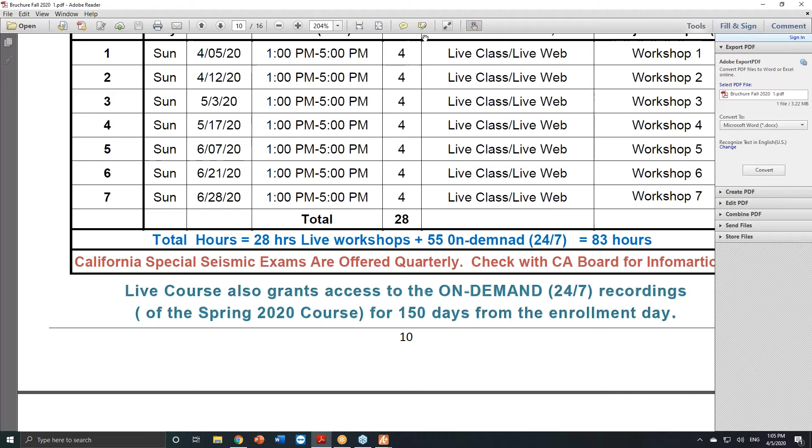Okay, good afternoon everybody. This is Dr. Mansour, and this is the seismic review for the second quarter. Today is April 5th, 2020, and this is the first session, as you can see by the schedule. So, the second quarter review.

Basically based on the textbook which I used in the first quarter, plus the 626, which has all the problems in all my books, the textbook, and the 300, and the 2 practice exams.

The course basically consists of 2 parts. The first part is the live workshops, the one we started just now, 28 hours, plus 55 hours or even more, I believe, until last night. My staff are working from home to set up everything to make it ready for you for the on-demand.

For the on-demand, you will get a username and password from us, where you can access the on-demand, which is 24/7 from any media. Normally we keep this for 150 days, so you will get access for 150 days.

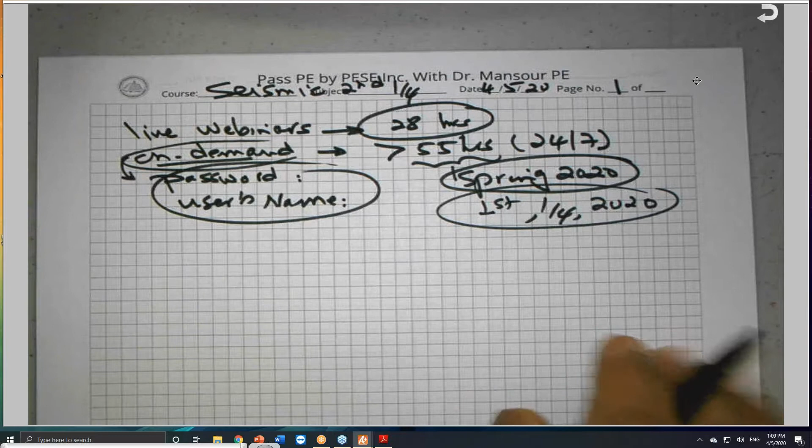So the current codes, or the on-demand, are based on the current codes, which is basically the California Building Code CBC 2019, which is based on the IBC 2018, and the major code is the ASCE 7-16.

Plus the other codes are still the same: the ATC 20, ATC 20-1, the timber design book, the textbook by Dr. Breyer, the masonry, and the timber book.

This textbook that I've used for about 20 or 25 years, meaning the Design of Wood Structures by Dr. Breyer, the 7th edition is still current, and this is Dr. Breyer's Design of Wood Structures. So this is wood design - let me use this standard language, wood design.

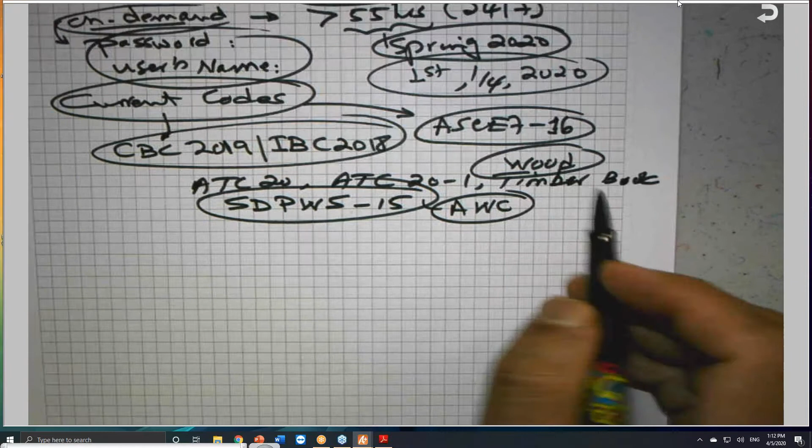Total, they are 9, I believe - 9 references, yes, they are 9, listed at the beginning of my textbook under the green tab. The green tab is special seismic exam, and they are - no, I'm sorry, 6. The 9 is the other course. Sorry, I mixed codes, too many codes, too many.

Let me get the other book. I believe the other book, the printing—there was one time the printing was bad. This one you can use, I believe this is what I call the correction copy, at least I can write anything. Yeah, this printing is the right one. So they are 6, no, not 9, as I mentioned. Sorry.

The other exam—so the 2019 California Building Code, Volume 2 only. You need Volume 2 if you decided to purchase that, or you can use the IBC. I prefer the IBC, it's much simpler and cheaper. If you'd like to purchase, you can purchase the IBC 2018. It's one volume.

The IBC is one volume without the commentary, but sometimes they have 2 volumes, where one has the code and the other has the commentary, which is an explanation of the code. So this is one reference.

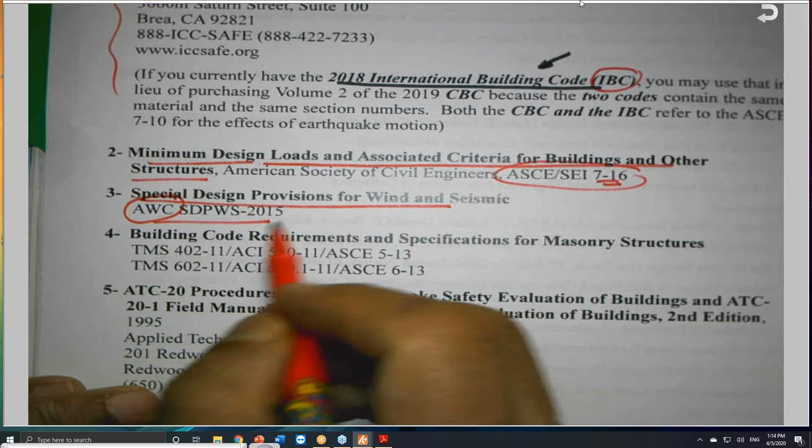The second reference is the minimum design loads and the associated criteria for buildings and other structures. This is a new code, the ASCE 7-16—10 is gone. There's also the special design of wind and seismic by the American Wood Council, AWC, and the special design provision for masonry, building code requirements and specification for masonry structures, another book by ACI 530, American Concrete Institute.

ATC 20 and ATC 20-1, second edition. And finally, number 6, Dr. Breyer's book, Design of Wood Structures, 7th edition, 2014, based on the ASD and the LRFD, the allowable stress design and the load and resistance factor design. So both design philosophies are included in the book.

So those are the references, plus the standard test plan, which I need to be aware of. I highly recommend you visit the California board website, which is available on our website, to see all the updated information, instructions, or news, especially in these days. I monitor this very carefully and frequently—California Board and NCEES—to see the status of the exam, new codes, new regulations, new standards, and new calculator policy, because they change from time to time.

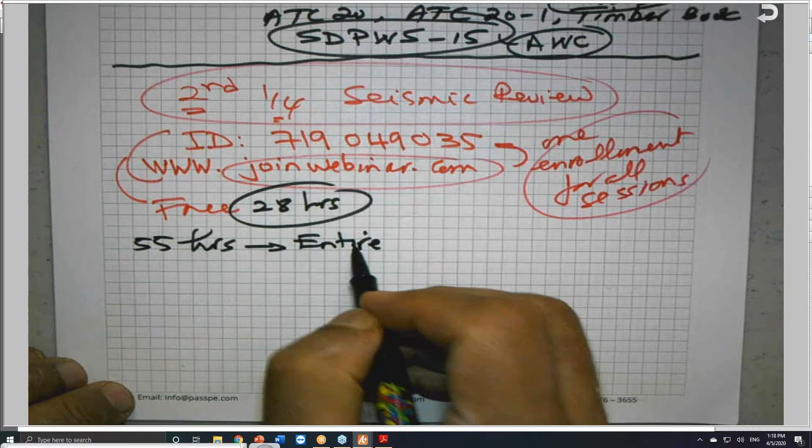55 hours, which is a course itself, because the 55 hours, this is the course I taught last semester. This is the entire course where I went chapter to chapter, and those who attended the first quarter know exactly what I'm talking about. We covered it to the best of my knowledge very well, and I did my best to explain all the topics and subtopics, and we solved many problems.

The workshops this quarter will be devoted entirely to solving problems, plus the concept. Any concept that is not clear to you, I will be glad to explain it.

For those of you attending the class for the first time, you need to go and watch this, watch the class, the on-demand by itself. Some other vendors sell the on-demand by itself as a course, and that's it. Here I am giving the on-demand plus the 28 hours of live class, so we can chat with each other and go over problems. I can explain topics or subtopics. But for those attending the first time, the on-demand is the one you need to watch, and you will hear the same thing. If I'm teaching the course again, you will hear the same song.

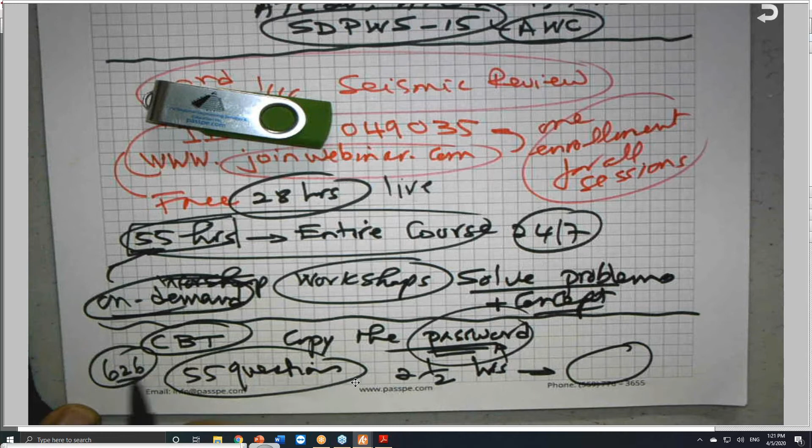In the 626, there are some overlapping problems. The problems are repeated twice sometimes because they are mentioned in some books and repeated in other books with some kind of variation. So I needed to take it seriously, even if you feel this problem already repeated before - look at it closely and do your best.

If you have any problem loading the software or running the software, I don't know how to fix it - I will forward your questions to the webmaster. So far we don't have any or very few problems, and I will do my best to help you as much as I can.

Okay, this is just the introduction. So let's go to the business of working problems, the way I was hoping to do it but didn't get a chance to - maybe I will do this next session.

Let me get my book here first, just to make sure - I have too many books next to me. I don't know what happened to my 626 with the cover, unless I gave it away, unless it's here somewhere, hidden. Forgive me, just let me get my stuff here.

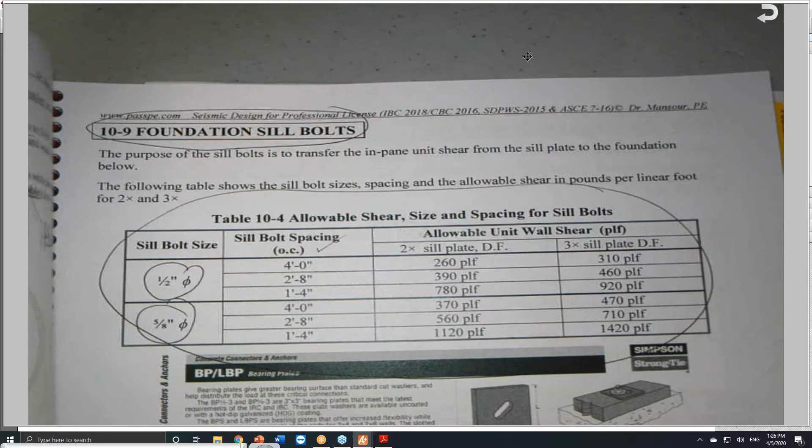This was something that, if you go to chapter 10, when we are calculating the rigidity for a shear wall, H over D, let me locate it quickly and I will tell you where it is. It is mentioned in chapter 5 and it was correct, but here, yeah, when I talked about shear walls.

So if you go to the text again, let me make sure I'm using only 2 books. When I say the textbook, this is the textbook, Seismic Design for a Professional License. And when I refer to the other book, I refer to it as the 626 book, book number 2. If you'd like me to write down book number 1 and book number 2, it would be a good idea. Sometimes I do that with other courses when I have more than one. So this is book number 1, which is the textbook, I call it textbook.

And book number 2, which is the 626, is a supplemental book that does have all these fancy questions, all these questions. So I will call it book number 2. This is number 2, which is the supplemental book or the 626 book, whatever you'd like to call it.

So if we go back to the textbook, just to make sure, in chapter 10, in calculating the rigidity R, I believe something is missing. It's mentioned correctly in chapter 5, but when it was copied to chapter 10, for some reason it was not. So if you go to chapter 10, I'm talking about this equation here. Let me make sure, this equation is on page 378, textbook.

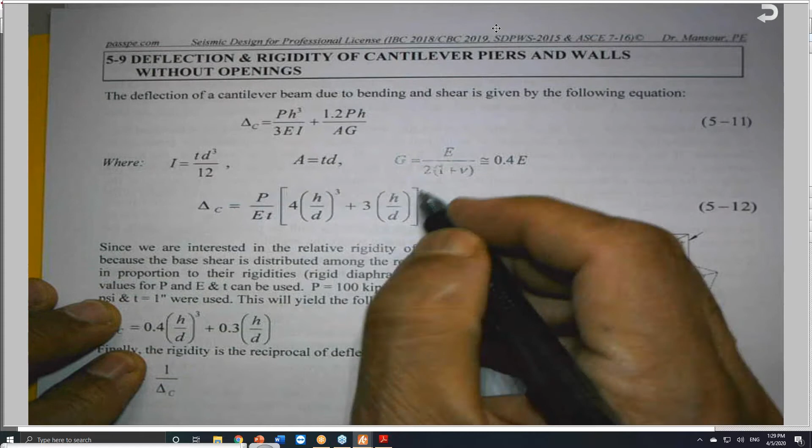You will find these 2 equations identically. I repeat them here just to remind you, in chapter 5. Let's go to chapter 5 so we can compare these equations. Okay, to make sure that we are, this is delta C, which is equation 5-13.

This is the correct equation: 0.4 H over D cubed, divided, plus 0.3 H over D. This is 5-13, I will call it 5-13 also. Sorry, this is for the cantilever. Yes, so this is equation 5-13, on page 152.

And the second equation, oh, so the mistake is in chapter 5. Now I realize, okay here it is. If you go to page 153, this equation 5-17, it is missing here H over D. Okay, here it is, which is the second equation, which is for the fixed case. This is on page 378 of chapter 10, you will find the H over D is here. So it is missing in chapter 5.

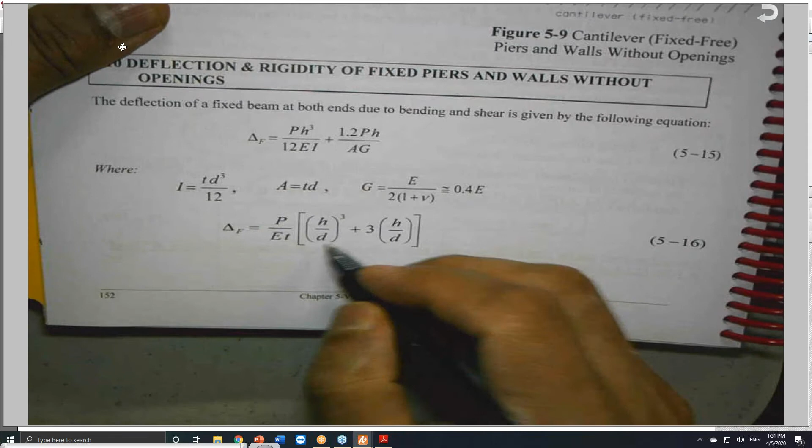So in chapter 10 it was correct, I reversed it for some reason, but here it is. I'm saying that here it is. So this is on page 153. Go to page 153, all you need to do is add H over D here for this equation. So this is something mentioned here, by the way, on the previous page. This is the equation, okay. But the H over D is over there, it was dropped.

So equation 5-13 is correct, and equation 5-17 on page 153, I need to add H over D, multiply 0.3 times the H over D ratio. So in this case, the two equations in chapter 5 match the equations in chapter 10. Okay, this is one thing that one of you pointed out. Thank you very much, if you have doubt about any.

The other thing that we corrected together in the seismic design category, it was copied, it is in chapter 13, masonry. Can you go to page 440? Page 440.

At the top here, I extracted the masonry seismic force resisting systems, SFRS. I extracted them from Table 12.2-1, this big table. But here it says seismic design category B, no, it's supposed to be, as in boy, C, D, E, and F.

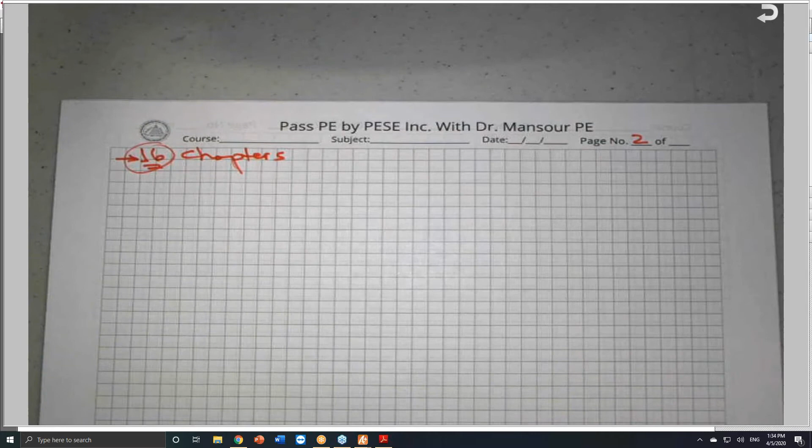Here I have 626 problems. My intention was, but because of a lot of things going on including my schedule, to extract some problems from here without the solution, just the problems, and put them in a form like a practice exam, and I need you to solve it in advance before you come to class. After that, they are coming from the book. I'm not going to reinvent more than what I have, or maybe add some problems here or there.

I always modify the problems, but I believe those who studied my books before, even without taking the course, it was sufficient for them to pass. They told me, Dr. Mansour, your books are self-contained, and we were able to understand everything because I explained as if you are sitting in a classroom. I try to explain as much as I can, but nobody is above mistakes, and nothing is called complete work. There is always room for improvement or continuous improvement. So this is my intention.

Probably next time I will do that because I was really busy with tons of things, this issue about family. So next time we're going to meet one week from today, so it is 7 days. Probably I can work on something and send it to you.

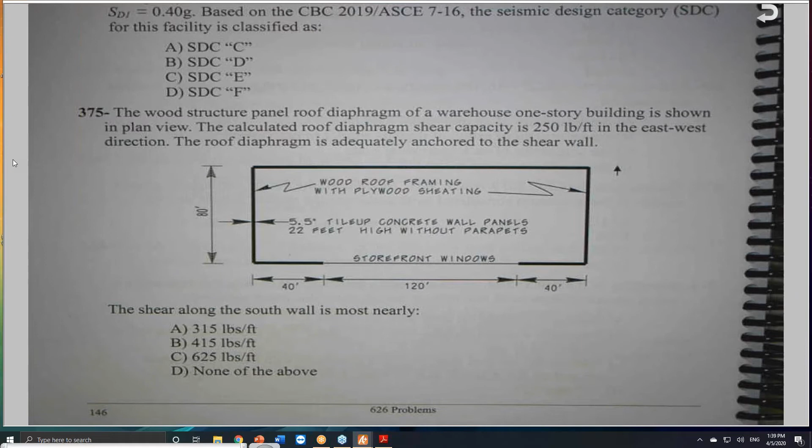So let's go to a problem. I'll open the book randomly - problem 375. Some of you are new, so I will walk you a little bit through the theory. Let us read the problem.

The most important thing in any exam, specifically seismic and surveying, is that you have only less than 3 minutes per question, because they give you 55 questions and only 2.5 hours. If you calculate 150 minutes divided by 55, it's less than 2.7 minutes per question.

So don't assume that these questions have the same time as the national exam. The national exam, as you know, gives 6 minutes per problem - they give you 40 problems in the morning and 40 in the afternoon, with 8 hours total. So the time for the seismic and surveying questions is less than half of the time given for the national exam. I don't want you to assume you have plenty of time - no, it's less than half.

This is the impression some engineers have, and they go in with that assumption. Your speed for the seismic and surveying exam should be twice, or at least more than 2 times faster, than for the national exam. Even on the national exam we say we don't have enough time - the seismic and surveying exam makes it worse by giving you less than half the time for each question.

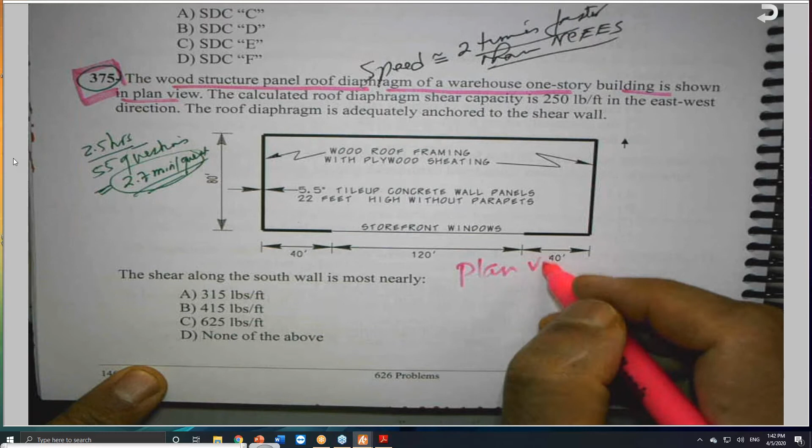The calculated roof diaphragm shear capacity is 250 pounds per linear foot in the east-west direction. There's something a little bit missing from the picture - there's supposed to be an arrow here indicating north arrow. This is something missing, I think when they cropped the picture and brought it from AutoCAD or MicroStation to Word, it seems to me this got left out.

So please note this arrow indicates the north arrow, because the direction of analysis is very important. In the east-west direction, if this is north, this is south, this is east, and this is west. The roof diaphragm is adequately anchored to the shear walls. The question is: the shear along the south wall is most nearly. From the plan view, these solid dark lines indicate shear walls.

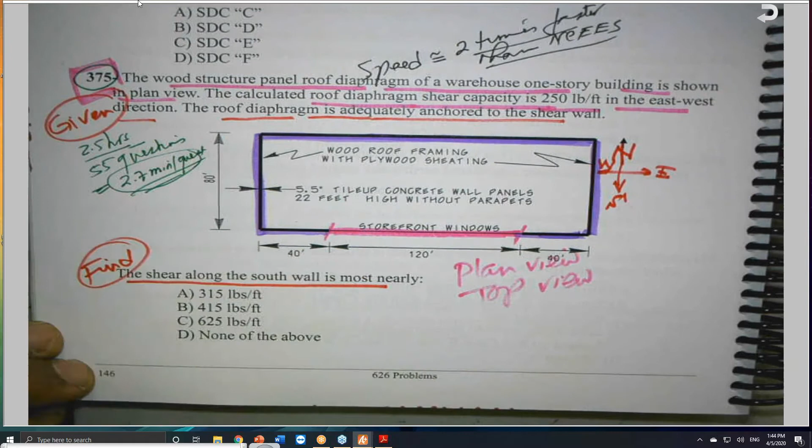And the shear along the south wall is most nearly - he's still looking for tau wall, the shear along the wall. But which wall? The south wall. The south wall is 40 feet and 40 feet, one piece here and one piece here. This we call the south wall. This is the north wall. This is the east wall. This is the...

So what is given? If you look at the equation, which I'll show you right now, it's equation 9 dash... Do you remember chapter 9? Okay. 9 dash 2 - let me see if I remember this equation correctly or not. No, 9 dash 3, sorry, and 4. 9 dash 3 and 4.

This is the tau wall. Here it is. This is equation 9 dash 4, on page 338 of the textbook. One equation for the tau, or sometimes we use V, lowercase v. On the same page, 9 dash 3, is the diaphragm shear, tau diaphragm along the shear wall - the shear along the diaphragm. This is the shear along the diaphragm.

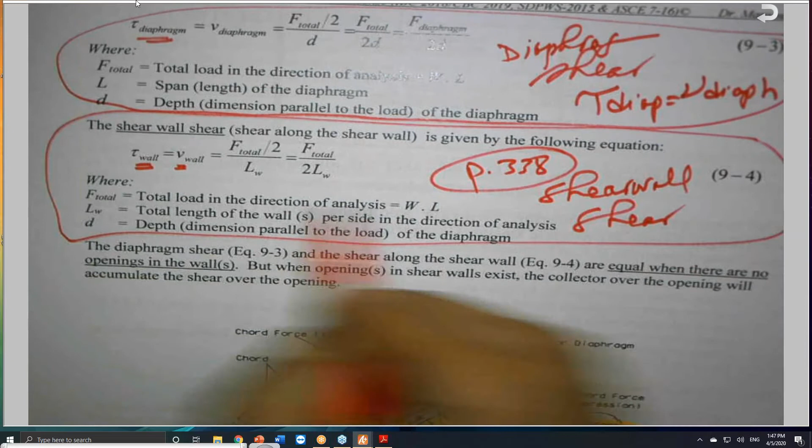We call it tau diaphragm, and this is the tau along the shear walls. So diaphragm shear, and this we call shear wall shear. This is tau diaphragm or lowercase v diaphragm. And this is tau wall, as indicated here, or v wall, as I told you they use this in the seismic design professions.

So the two equations, 9.3 and 9.4, are based on something called F, which is a total force. F is the total load or force in the direction of analysis, which is W times L, if W is given, or W is a uniformly distributed load. If you go to the previous page, I'm referring to this drawing here - if this W is given, which is a load, this is a lateral load.

But he gave me something here. He said the calculated roof diaphragm shear capacity is 250 pounds per linear foot. I need to translate this - what is this? We need to understand this very, very well, please, because this could be the difference between getting the right answer and the wrong answer. If this is the lateral load W, or this is the tau diaphragm - because there are two numbers, I will explain it one more time, because if we can differentiate between these two, that means we are in very good shape.

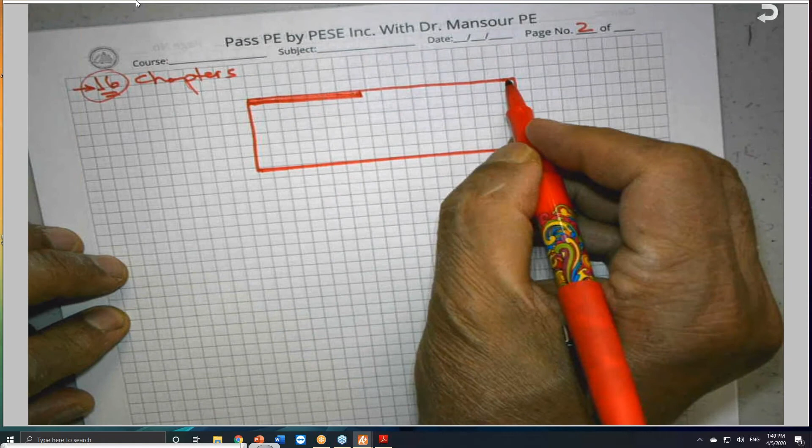Let's assume that we have a wall here. Let's assume this wall here is a short wall like this. Let's assume we have a complete wall here. And we have a wall here. And we do have a wall here - a different configuration. Sorry, my drawings, sometimes I use a straight edge to try to make it nice, and this is normally - the direction is very important, this is why we need to know what direction. So this is the north direction. I will call this wall number 1, number them wall number 2, wall number 3, and wall number 4. And let's give some dimensions.

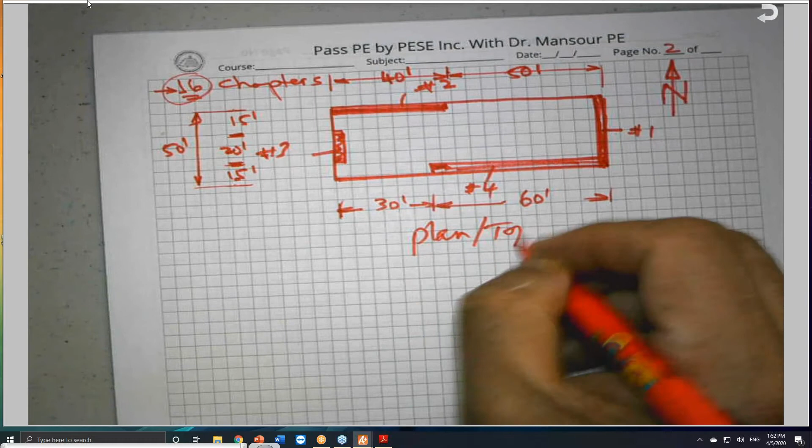So assuming this is centered, assuming this is okay - so this is 15 feet, and this is 20 feet, and this is 15 feet. So the total here is 50 feet. Let's assume this is 30 feet, and from here to here this is almost twice, so I'll make it 60 feet. And this wall here, since this is 90, I will make this 40 and 50, so the opening is 50. At least for those attending without the book, you can follow me - this is 50 feet and this is 40 feet. This is a plan view or top view of a story of a building.

If the lateral load is given, which is the lateral seismic load, obviously I number these walls. This is wall number 3, wall number 2, wall number 1, and this is wall number 4. Let us assume that I give you the load. I said the load can come from east or west - it does not make any difference. So I give you a load in the east-west direction.

To be 80 pounds per linear foot. So this is W, sometimes we call it W, uppercase or lowercase, W sub S for seismic. This is 80 PLF.

Here we can calculate equation 9-3 and 9-4, the one I was referring to. Equation 9-3 says tau diaphragm, or V diaphragm, assuming that this diaphragm is flexible. Let us mention this statement, and I can explain the difference between flexible and rigid, but flexible diaphragm.

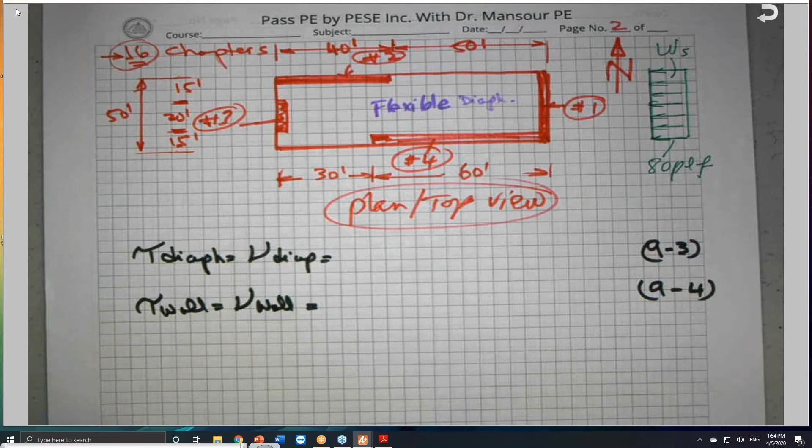Diaphragm, what is a diaphragm? Diaphragm is the roof of a building or the floor of any building. This is called a diaphragm. Diaphragm is a horizontal or nearly horizontal element that will transfer the lateral load to the vertical resisting elements.

These definitions at the beginning of my book, I defined all these things, which I did not create or invent. I took them from textbooks or codes, because if a code has a definition, we have to stick with the definition of the code, because this is what they are going to test you. Assuming that you have a building like that.

So what is a diaphragm? A diaphragm is horizontal or nearly horizontal. This is the floor of a building. This is a diaphragm, this is a diaphragm. This, the entire thing here, the roof, is a diaphragm. So this we call nearly horizontal, horizontal because of the slope. If this is horizontal or nearly horizontal.

So this and this together acting as, because this is one piece, this is the roof of a building, roof. So this is a diaphragm. And what is the purpose of a diaphragm? Diaphragm is a horizontal or nearly horizontal element that will take the lateral force, seismic lateral force.

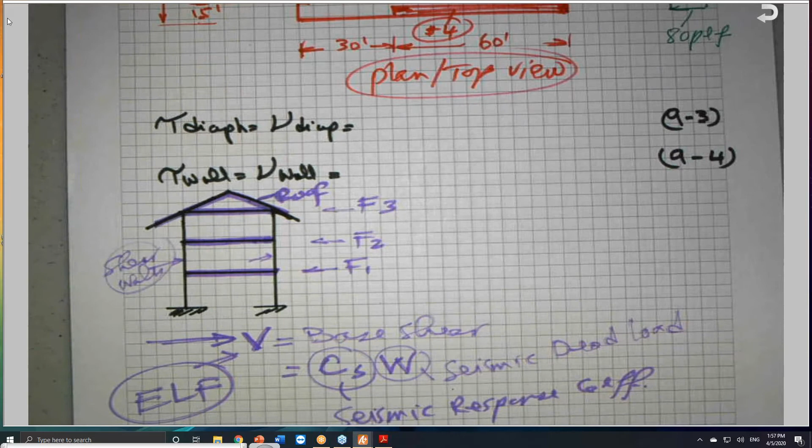So the shear walls or the frames of a building frame, if a building frame exists, will take care of the lateral forces. So these lateral forces will go through the diaphragm. Diaphragm will give it to the columns, and the column or the shear wall will take it to the foundation. And this is our ultimate goal, to get the base shear, and this will be the distribution. Do you remember the distribution? We talked about distribution in chapter 6.

Distribution, when we said that F sub X is equal to V times C sub VX. This is a vertical distribution factor. C sub Vx.

So the distribution will be done, and this force will be determined. This is not the story right now. The story that I'm telling you is that a diaphragm is the roof of this building. But I try to elaborate a little bit, at least to remind you of what we are talking about. So this is just to explain what this is given. This is given as the seismic load.

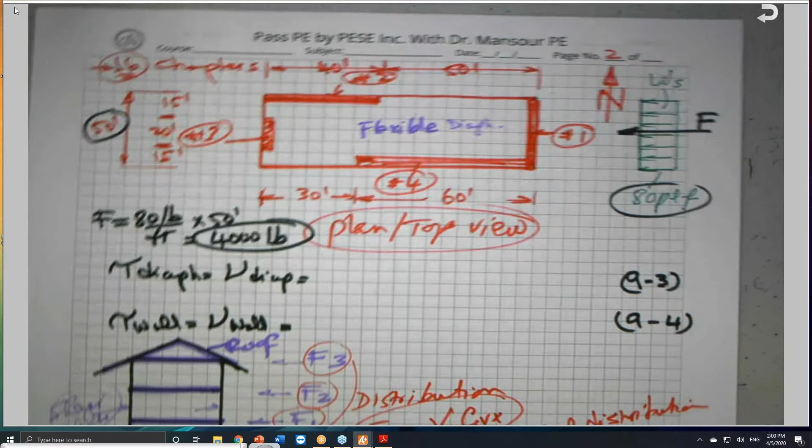Since this is a flexible diaphragm, half of it will come here. This is F over 2, and this is F over 2.

So tau diaphragm, if you go and look at equation 9-3 one more time, where is 9-3? Equation 9-3 is F over 2, half of the force, divided by D. We need to be careful what is D and what is L. Very important.

Do you remember that in chapter 9, what is D and what is L? D is the depth and L is the length. We have a dimension parallel to the load, and a dimension perpendicular to the load.

Dimension parallel to the load, as you can see, the load is coming this way, east-west, and there's a dimension perpendicular to the load. We call these chords, in fact it will be like this, this is going to be like this, and this is going to be like this. This chord will be under compression, and this chord will be under tension.

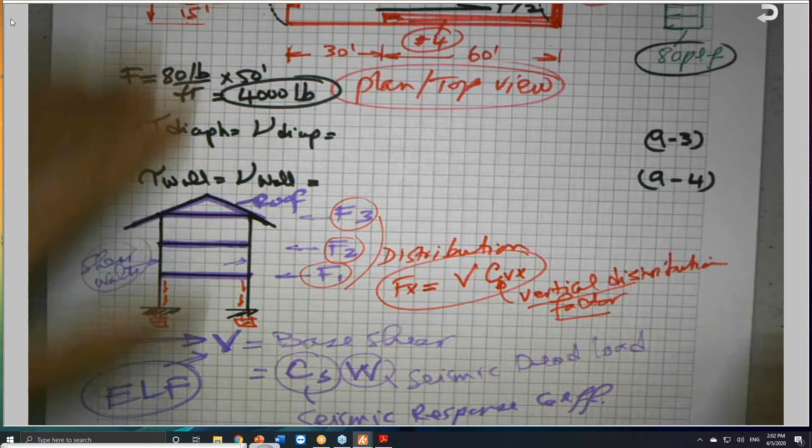Do you remember this 3D view on page 338? So this dimension and this dimension, which is perpendicular to the load, we call it L for this direction. So this dimension here is L. Always the length is the dimension perpendicular to the load, and it's mentioned at the beginning of the book. The other dimension from here to here, we call it D, as in David or doctor.

The reason we don't use W here is because we are using W here. So the V diaphragm is equal to F over 2 divided by this length here, because the diaphragm exists over an opening. So 50 and 40 is 90, divided by D.

So in this case, F over 2, which is 2,000 from 4,000, divided by 90 feet. This will give you PLF, pound per linear foot, because this is pounds. So it is 2,000 divided by 90, which gives you 22.22 PLF, a small quantity because I just made up the problem.

What do you call this? This is called the diaphragm shear, or the shear along the diaphragm. So far so good, this is just a problem I made in order to introduce you to the actual problem, problem 375.

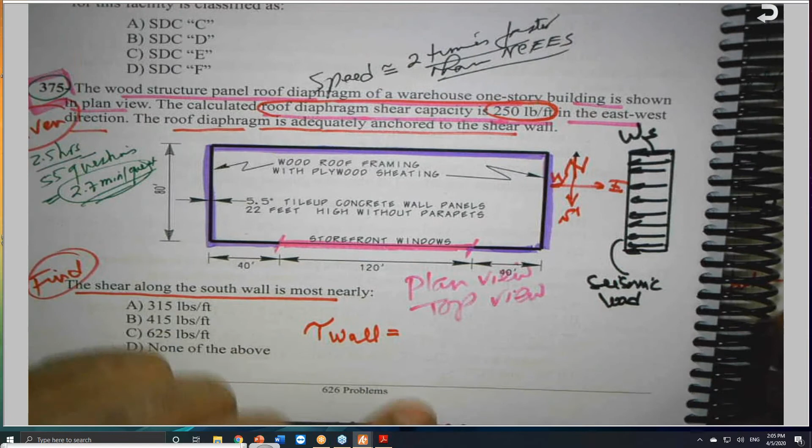But it's given to you as a distributed load, which we call W sub S, like the 80 pounds per linear foot I gave you. You multiply 80 pounds per linear foot times this length here, because every foot has 80 pounds. So if I have 50 feet, this gives me 4,000 pounds total, which is the total load F, the seismic load, whatever the number is.

But we just calculated something, the 22.22. This is called tau diaphragm, which is the diaphragm shear. Let me use a color here, this is like that, tau diaphragm. The diaphragm shear exists over an opening, because the roof exists over an opening. Have you ever seen an opening that does not have a roof? No. So this is the tau diaphragm.

So the question is, this 250 pounds per linear foot, is it the load or the tau diaphragm? No, it's the tau diaphragm. So he gave you the tau diaphragm directly, and is asking for the tau wall, the tau wall on the south wall.

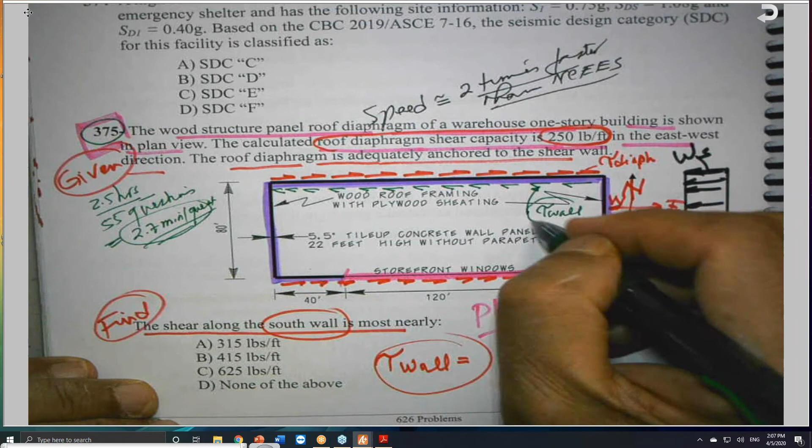So what is the relationship between the shear along the wall and the shear along the diaphragm? If there is no openings, they are equal. And this is why, let me ask you another further question.

What is the drag force here? The drag force is 0. Do you remember the drag force? The drag force is 0. Zip. Why? Because the tau diaphragm and the tau wall are equal.

But for the south wall is a different story. Tau wall is going to be much larger than 250 because I have a short wall. This wall has only 40 feet and 40 feet here. So total of 80 feet, and I have an opening.

So the tau wall, according to equation 9-4, and I am referring to the text again. If there is an equation that's taken from a code, I put the equation of the chapter. So this is the text. And we don't have chapter 9 of the ASCE 7.

Do you remember the ASCE 7? The ASCE 7, the one we use, the ASCE 7-16, we have chapter 1 and chapter 2 and chapter 11. This is 1 and 2 - they write it this way, by the way, not numerical. 11 and chapter 12

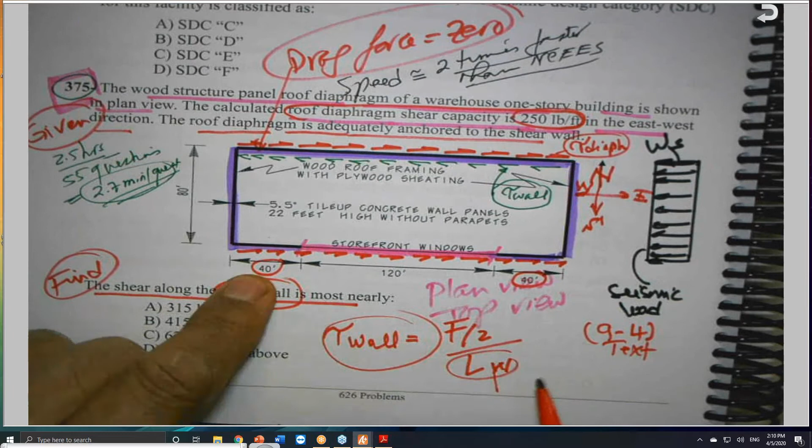F over 2 over L sub W. The length of the wall is so easy. It is 40 and 40 is 80, which is 40 feet plus 40 feet. Do you agree with me? Because we have an opening here, 120 feet.

But the mystery, where is F? He didn't give me an F directly. If he gave me W, as I did in the example problem, I'll multiply W times this dimension, will give me the total F. Half will go this way and half will go this way, because he said that this is a wood structural roof diaphragm.

Why do I assume that this is a flexible diaphragm? Okay, here it is. Wood framing with plywood sheathing. Okay, wood structural roof diaphragm. We talked about the difference between rigid diaphragm and flexible diaphragm, and we said that all wood structural roof diaphragms are flexible diaphragms by default.

Flexible diaphragms. That means that the force acting on the building, half of it will come this way and half the other way. So if this is the total F,

so I know there's F over 2 this way and F over 2 this way. Who told me that? Do you remember the 7 rules? If the diaphragm is flexible, the lateral force will be distributed by the tributary area. A tributary area means that this side will take half and the other side will take half. This is a tributary area.

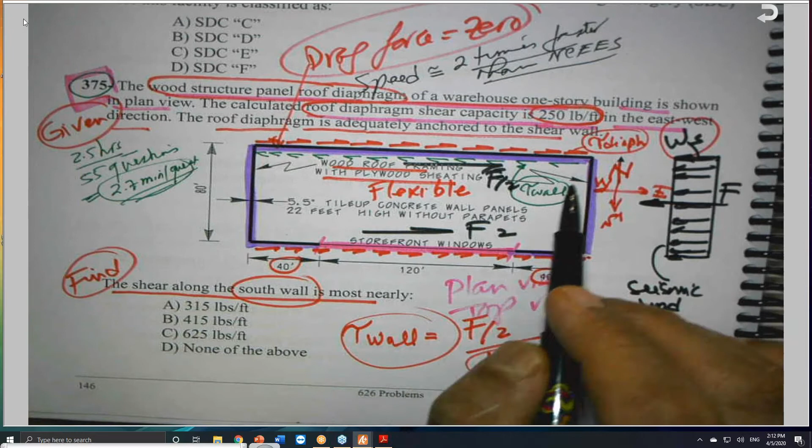But if the diaphragm is rigid, we are talking about a different story - I will talk about it. Did he give me F? No. Can I find F? Because I need F in this equation. Yes. F basically, he gave me the shear, the tau diaphragm, 250 pounds per linear foot.

250 pounds per linear foot. So if I know the length of this, which is 40 plus 120 is 160 plus 40 is 200. So every 1 linear foot, I do have a shear of 250 pounds. So the total, so this is F over 2, sorry. Okay, so the F over 2 this side is equal to what? Is equal to 250 times the 200.

So in this case, I can say that the tau wall, let me use the same color to solve the problem. So tau wall is equal to what? Is equal to F, which is F over 2 in this case, which is this side here. F over 2 is equal to 250 times this dimension, which is 200.

200 feet, this is PLF. And I know the L sub W is 80 feet. If you do this calculation, let's do it together: 250, enter, 200 times 8 divided... I ended with 250, sorry, 200 times 80 divided, I came with 625. PLF.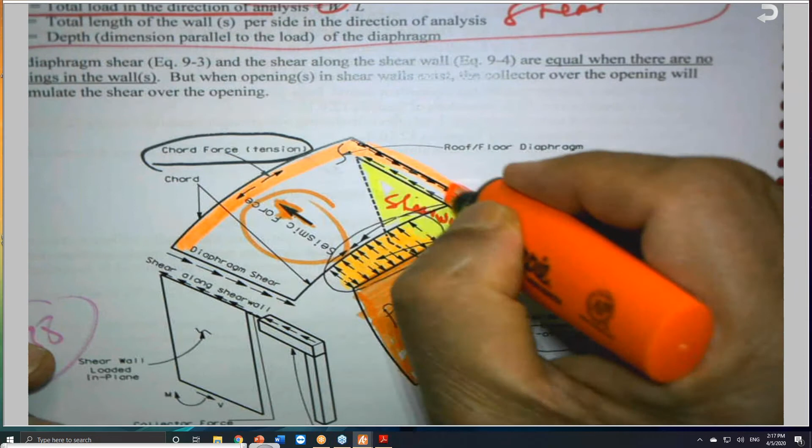And this is a diaphragm, the diaphragm, the top one. Let me color it, hopefully I can have different colors, the one shown in the deformed shape. As you can see here, these arrows here, this is the tau diaphragm. This, by the way, is on page 338. Tau diaphragm.

And let me use the green one as I use it for the problem. Tau wall is this on the opposite side, tau wall. And you can see the arrows here and the arrows here, they are the same. Tau diaphragm and tau wall are equal, these are equal. Equal, why? Because this side has no openings. Okay? They are equal. And this is why we are saying that along this side, the drag force is equal 0.

No drag, because the drag force is coming very soon for the problem that we are solving. But if you look to the other side of the building, we do have a wall here, but this wall is short. Why? Because we do have an opening, this is an opening, a door, as you can see. But we have the top plates on the top, we call them collectors, or we call them drag struts.

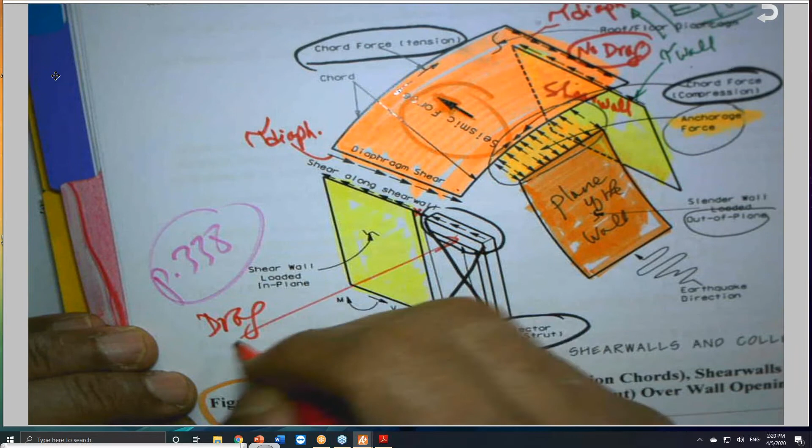Here we have a drag force. A drag force exists, a drag exists, or exists, you see that? This is exactly as in our situation here. We'll see that here drag force is equal 0 because tau diaphragm and tau wall are equal. Here now, the tau diaphragm is still 250, but the wall along the south is 625 more. It has more shear because it's a short wall, because these walls are not the same length as the wall to the north side. Make sense?

I needed to be following all this. So in this case, problem number 376, no calculations, it's talking about the north side, the north wall. Here it is.

This is going to lead us to the second topic, which is drag force. It's giving you the same problem, and it's supposed to be the north arrow also, the same configuration. When I ask the people helping me, some of them are engineers, some are not, so probably my engineering notation is sometimes a little bit confusing. This, by the way, is a solution, but let us give it to you to help you. He said, what is the drag strut force? This is drag force or drag strut force, they mean the same thing, over the store front window opening. Here is a front opening. Drag force, how many pounds?

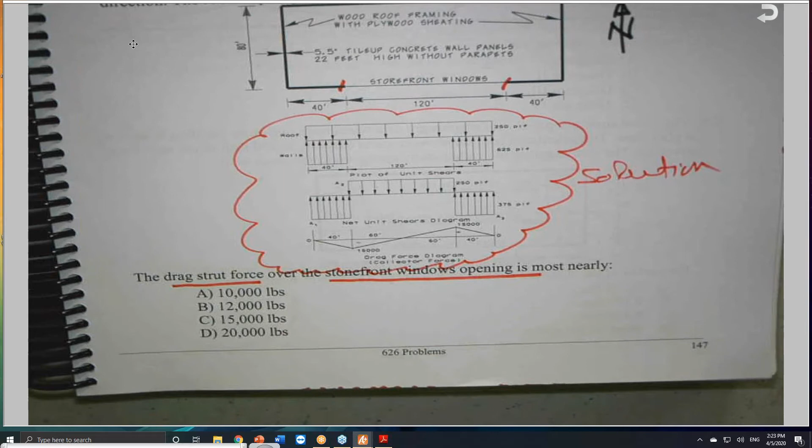Let me explain a little bit more as a reminder and also as a refresher. A drag strut force, or simply a drag force. And again, let us take

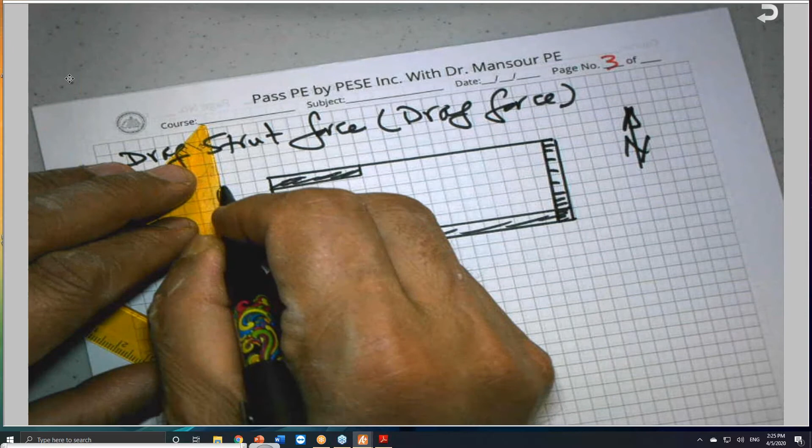a hypothetical scenario. Let's assume these are the walls. My drawing is not the best drawing, but here it is. And we do have a continuous wall here. And again, the north arrow. Let's assume that the lateral force is given as 400 PLF. For the sake of discussion, assume this dimension here is 25 feet, and this dimension here is maybe 75 feet.

And this is a flexible diaphragm. Here we said that tau diaphragm is equal to tau wall. Let me give you the dimension here: assume 60 feet. And each one of them is equal to 400. Right now we are experts. Times 60, divided by 2, divided by 100 feet. Correct me if I'm wrong.

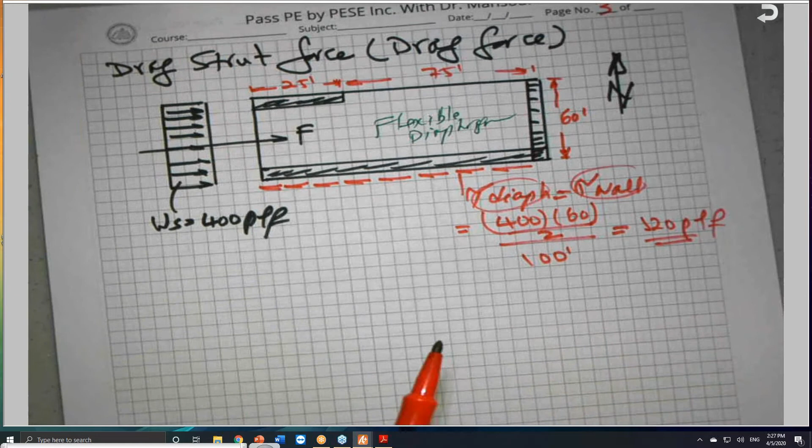Now we concluded that tau diaphragm and tau wall are equal, so this is zero drag force, zero drag force along the south wall. But along the north wall here, this wall is short. This is whatever, windows and doors and display windows, whatever. This is an opening.

Tau diaphragm here is still the same because the roof exists over an opening, so tau diaphragm is still 120 PLF. But tau wall, the north side or north wall, this wall here, is equal to what? It's equal to 400 times 60 divided by 2 -- this is F over 2 -- divided by the length of the wall, L sub W. This wall here is only 25 feet. So it is equal to what? So it is 400... it gives us 480 PLF.

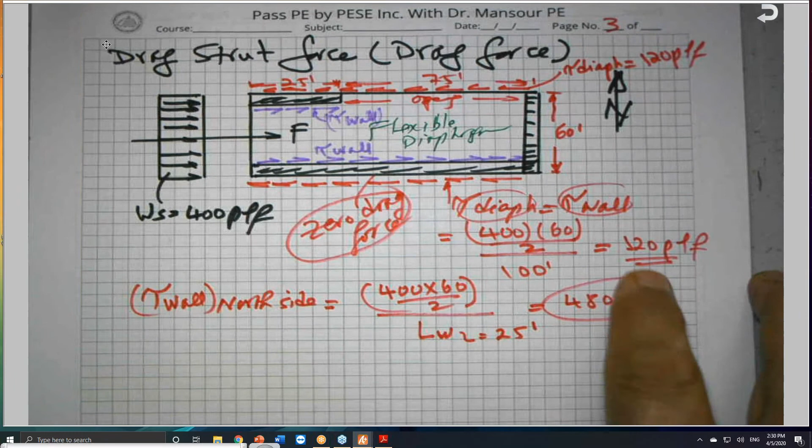So along, if I use a different color here, let me try to use as different colors as I can, at least two. So this is the tau diaphragm. Tau wall, I will draw it with a different color. It is opposite to the diaphragm direction. Here they are equal along this side, this is tau wall. Here, the tau wall is here, and stop, because there is no wall here. So this is tau wall north, which you can see is way, way more -- 4 times the 120 pounds per linear foot -- because this is a longer wall, so it will stress less. This is a short wall. It will take the entire shear from the diaphragm.

This is the responsibility of this wall, is the diaphragm. What is the load? The seismic load. This is a seismic load, this is a seismic load, load or force. We need somebody to take care of it. Otherwise, the building will collapse. So the roof will tell, okay, I am responsible to take this and deliver it to the walls.

So the diaphragm is a horizontal or nearly horizontal element that is responsible to take the lateral force and deliver it to the vertical resisting elements. We have vertical resisting elements, or we call it lateral force resisting systems, which is LFRS. Do you remember lateral force resisting systems we talked about, or vertical resisting elements or systems?

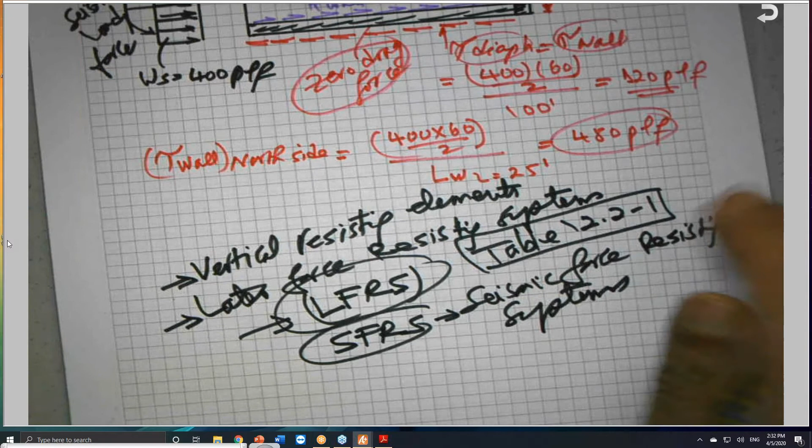And this is what, do you remember table 12.2-1? The big table, the biggest table in the code, the one that has 83 systems. We went over this before, systems A, B, C, D, E, F, G, H. H, I think that's it, there's no I after H. This is in chapter 12, the biggest table, and I put it in a very nice way for you. Let me check if they have H and I, or just H. Here it is, H is the last one. A, B, C, D, E, F, G, H. So A to H.

So sometimes I need to double check, because if I forget something, I will not hesitate to go and check it.

So we know the north wall is more stressed than the south wall, because it's shorter. And this is why when we design, we have to be careful about that, as far as the dimensions of the wall, the thickness of the wall, and the material of the wall.

So there is a drag force over this opening. Here, drag force equals zero. Here I can write with certainty that a drag force exists over the opening. Yes, a drag force.

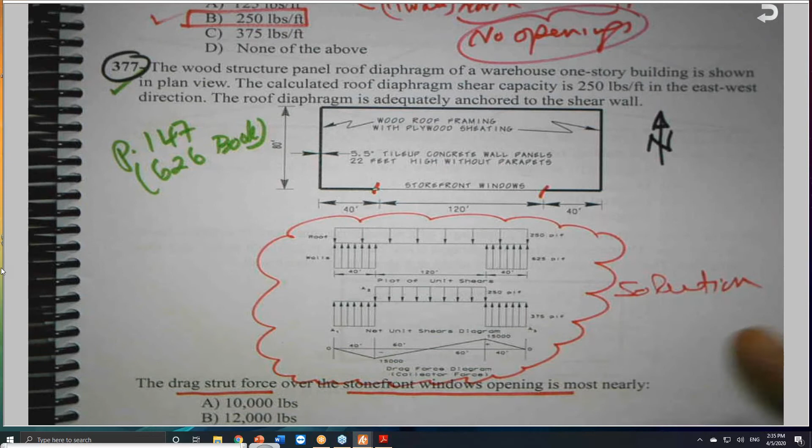There are three ways to calculate the drag force. This is through diagrams. Diagrams. Which is, I told you, the solution using diagrams.

I did not invent it. In fact, in Dr. Breyer's book, one of the references, reference number 7, in chapter 10, probably I showed to you. Here it is: diagrams, force diagrams. Exactly as I'm going to explain after the break. And this is the collector force or the drag force. In this book, on page 548, if you have the textbook or if you need this page, I can send it to you. This is from Dr. Breyer's book, which they call the Bible of timber design. If we understand this, I used it for 20 years or so to teach the timber design classes.

There are more than one way to calculate the drag force. Dr. Breyer's book discusses three methods. The diagram method I showed you is more effective in understanding the concept, so I will use the diagram method, or the solution using diagrams.

So if we look to the north wall, or the north side of the building, what we'll find is there is a force along the diaphragm, and I'm going to draw a diagram for that over the entire length of the diaphragm, which is 100 feet. I will call this tau diaphragm.

It is uniform over the entire length. This is tau diaphragm, which is the one we found along the north side. Tau diaphragm is still the same, 120, like exactly the tau diaphragm along the south. This is 120 PLF.

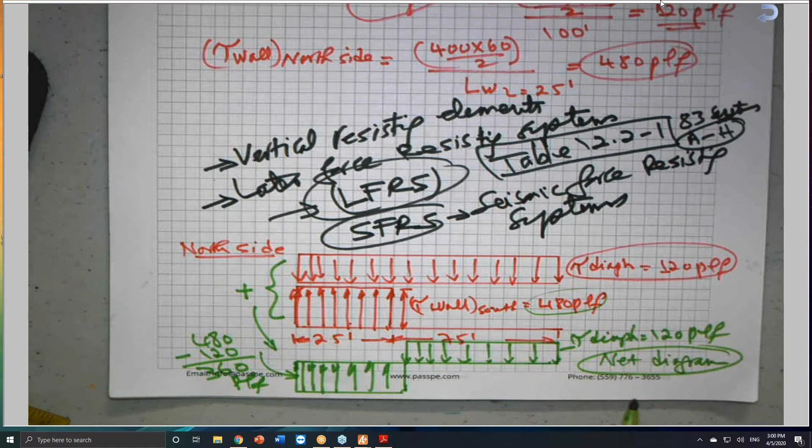So far, so good. If you look to the area under the net diagram, this area here, you will find something amazing. This area here is equal to what? Equal to the height, which is 120, times the 75, because we know the opening is 75.

This is 75 feet. Let me move this a little bit to the left. Here it is, to match exactly the dimension. So this area here is equal to 120 times 75.

And this area here is equal to 360 times 25. If you calculate the area of this diagram and the area of the other diagram, they should be equal, otherwise I have something wrong. So 120 times 75 is 9,000, and 360 times 25, amazing, is also 9,000.

How? Let me draw the diagram on the following page. I was hoping to squeeze it in here, but it will be very crowded. Let me do it on the following page, even though it's better for continuity to have it together. So the drag force diagram will be like this. This is the side I'm talking about, the north side. I have 25 feet and 75 feet.

Let me use the red one. This is a tau diaphragm. Tau diaphragm is equal to 120 PLF.

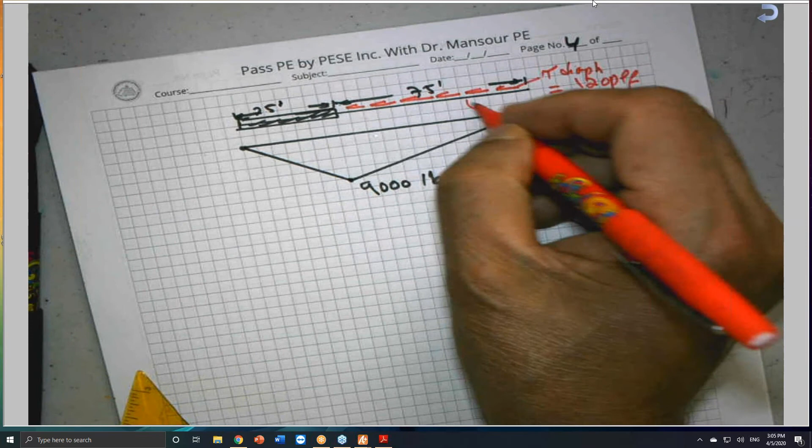I have a collector here, a member on top of the opening, with two plates, double plates. They will collect the shear. This is what they call collectors. What do they do? They collect the shear from the diaphragm.

I need you to use logic, because logic can sometimes solve a problem so easily without too much math. So every one linear foot, there is a shear of 120 pounds coming from the diaphragm. Who's going to carry it? The collector will collect it to deliver it to the wall, because the collector cannot carry it.

The collector just collects and delivers, because the wall is connected to the foundation. The shear wall is connected to the foundation, and we need the force to come down to the foundation, and the foundation will take it to the ground, to the soil supporting the structure, because this is all what we do for gravity loads. The same story for the lateral loads: collect the load, transfer it, and deliver it to the foundations, and the foundations will take it to the ground, to the supporting soil.

So I have 75 feet, and every one linear foot I have 120, so 120 pound per linear foot. If I have a 75 foot opening, that means the collector will collect this. Is this correct? 120 times 75 equals the 9,000 we calculated together. So the collector is going to collect 120 for the first foot, the second foot, all the way up to here, and deliver the 9,000 to the wall. Here, this is the delivery point, where we have the maximum, the 9,000 pounds.

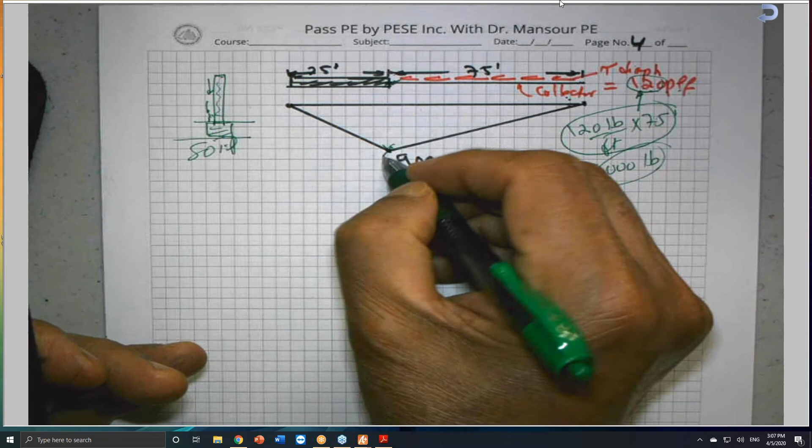The wall will absorb all this over its entire length. This is called, and to draw it upside or downside is not a big deal. Positive or negative, don't worry about that, because the load can come from the right or from the left. Tension or compression is not a big deal. So this is the drag force diagram.

The problem that we have is the opening is in the middle, not at either end. You see, the opening here is problem 377. It is here. I did the same thing, by the way. Here it is, I draw the diagram, the roof, the 250 for the roof. And the walls, the two pieces of the wall, the 625, the one we calculated together, here it is.

And the following diagram is the net diagram. Here it is, I call it the net unit shear diagram. Let me find a different color here, hopefully one that makes more sense to you. This net diagram.

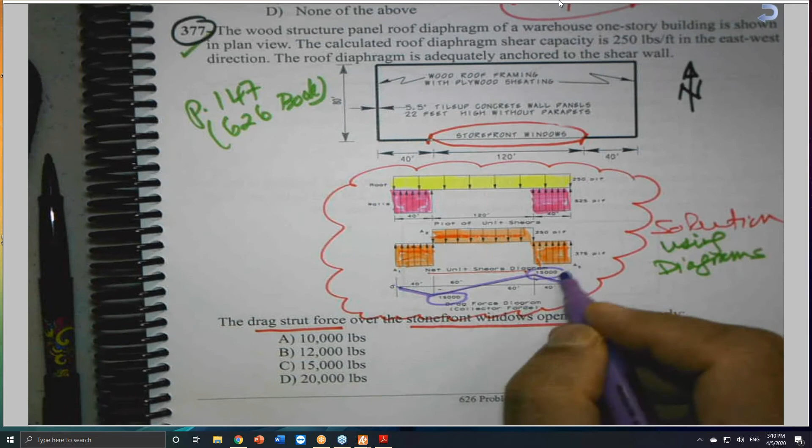Okay, and finally I draw the drag force diagram, which comes from zero at both ends, comes here, and crosses, and here it is. Each one is 15,000 pounds on each side, which is this area, by the way. This area, I call it area 1, and this is area 2, and this is area 3. Area 1 is this area here, and area 2 is this area here, and area 3 is here. So if you calculate the areas, they should balance. Let me get closer here to see what I mean by all this.

This is my preferred way to calculate the drag force, and we need to train ourselves as far as the shape. If the opening, sorry, is on one side like this, I need you to know that the drag force... for example, let me draw another drawing.

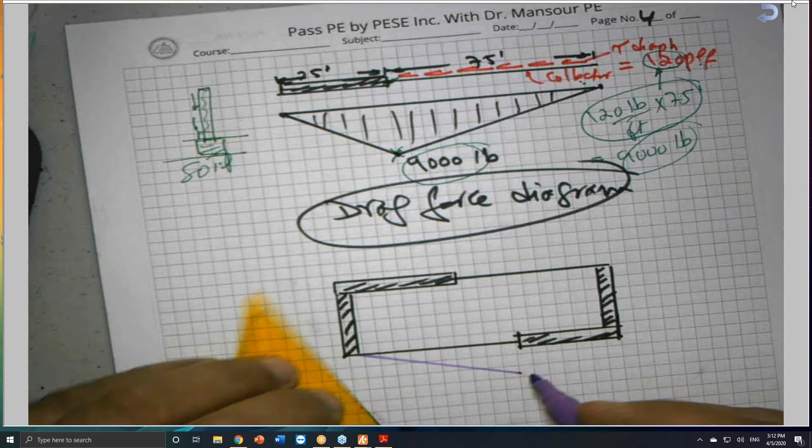This one here, the drag force diagram will be like this. Let me draw it on top. This is the drag force diagram, and this is the drag force diagram. Obviously, it is zero at both ends, like the chord force, if you remember the chord force.

But if you look at another scenario, similar to ours, where you have the opening, it is somewhere not at the end. Like this, I have an opening here and an opening here.

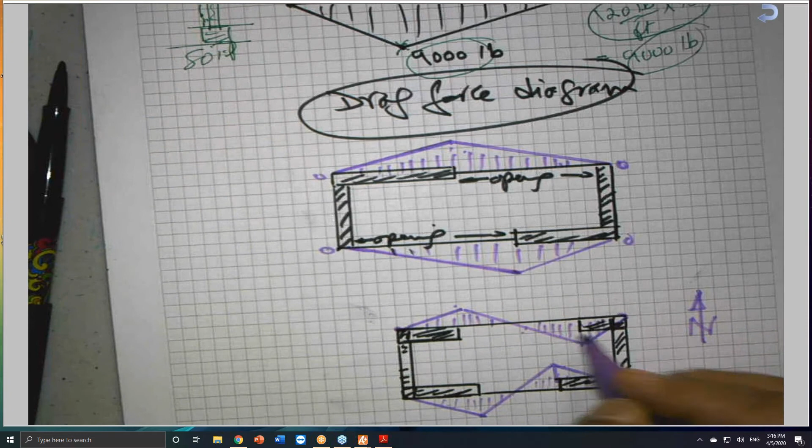Another case, I need you to think about it. What about if the wall has an opening here and another wall in the middle. So I have two openings.

So we do have an opening here and an opening here. Like this, this is an opening from here to here, and this is an opening from here to here. Now from here to here we have an opening, and from here to here opening. What will the diagram look like? I need you to draw it when I scan these things by the end of today. I need you to look at it and let me know what the diagram will look like.

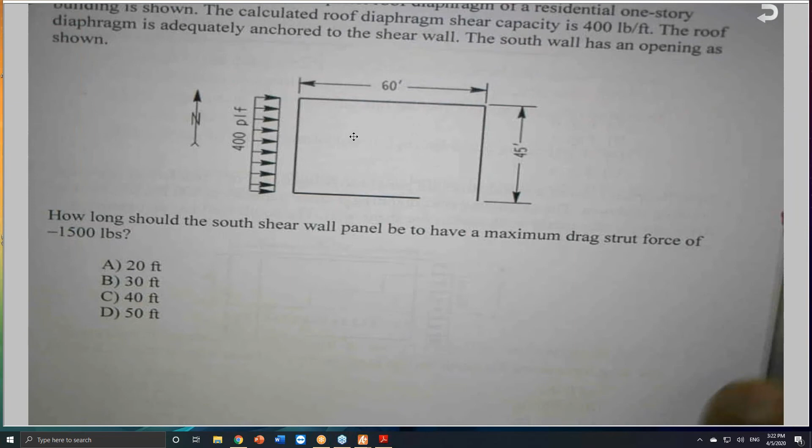Problem 245. Problem 245. If you don't have the book, you can read it and tell me what you think. I will give you 2 minutes, and let me just focus as much as I can and get it as clear as I can.

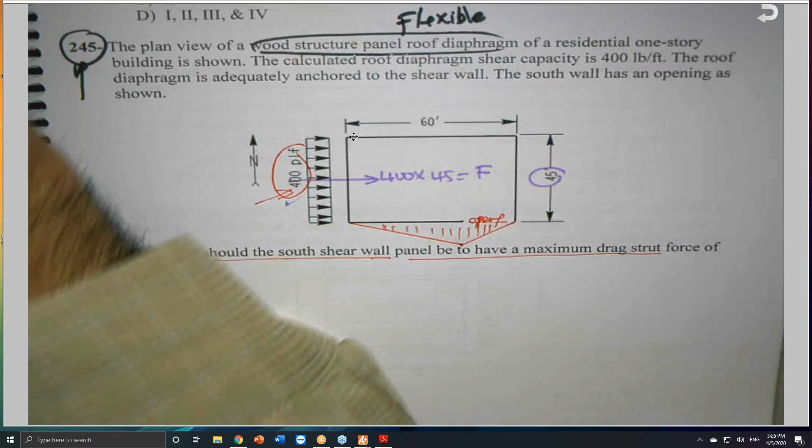So I know F over 2 will go this way, and F over 2 will go this way. Without complicating things, without using equations, there are some equations available, and I have it in my books also, or diagrams. I just need this amount here to be 1500 pounds.

We said that we have something called tau diaphragm. Do you remember tau diaphragm? The tau diaphragm exists even over the openings. And the same story here. This is a tau diaphragm, which is equal to F over 2 divided by this dimension, which is 60.

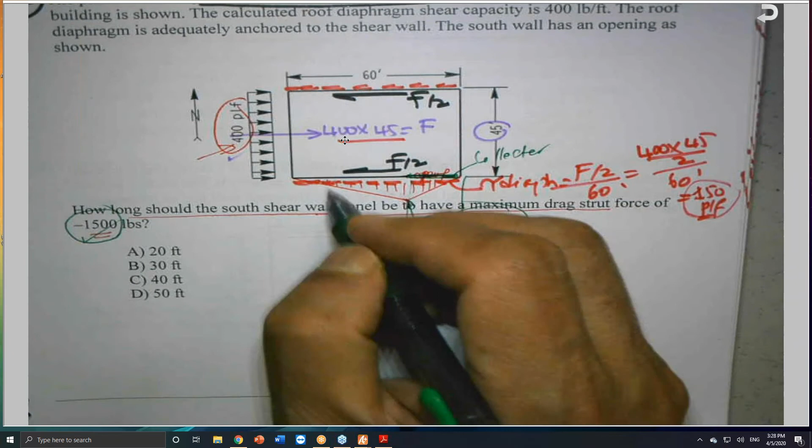The diaphragm, based on the calculations, is 150 pounds per linear foot. I need to be maximum 1500. So how long should this opening be? Every 1 foot, 150. So 150, another 150, another 150. Over a 10 foot opening, I can collect 150 times 10, equals 1500. This is what he's looking for. That means what is left here is the wall length, which is 60 feet minus 10 feet, equals 50 feet, and this should be the answer.

Agree or disagree? I need you to understand the logic, and after that, equations or diagrams are good. I'm not saying don't use equations or diagrams or a combination of both, but let us grasp the concept and understand what's going on, because sometimes I can pick up the equation and misapply it.

So we need to be aware of that, please. Since we are on the same page, in chapter 2.

You know, the law has the Professional Engineers Act. You need to get a copy of that, by the way, the Professional Engineers Act. You can download it for free. I highly recommend you to download it.

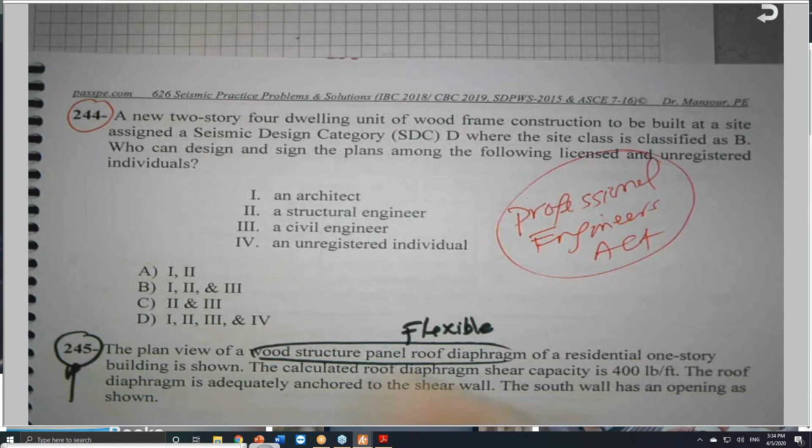So here on the same page where we were talking about the drag force, problem 244, a new two-story dwelling unit of wood frame construction to be built at a site of a seismic design...

category SDCD. We need to know how to determine the seismic design category SDC. It's very important - SDC A through F. We talked about that, and I'll be glad to explain it one more time.

And the site class is B as in boy. As you know, the seismic design category SDC uses the same letters - not almost, the same letters, unfortunately. So the seismic design category SDC has A, B, C, D, E, and F.

A being the safest one, and this is why I did not include it in chapter 12 of ASCE 7. This is the safest - a place that does not have any seismic activities, because there are no known seismic faults. And F is the worst.

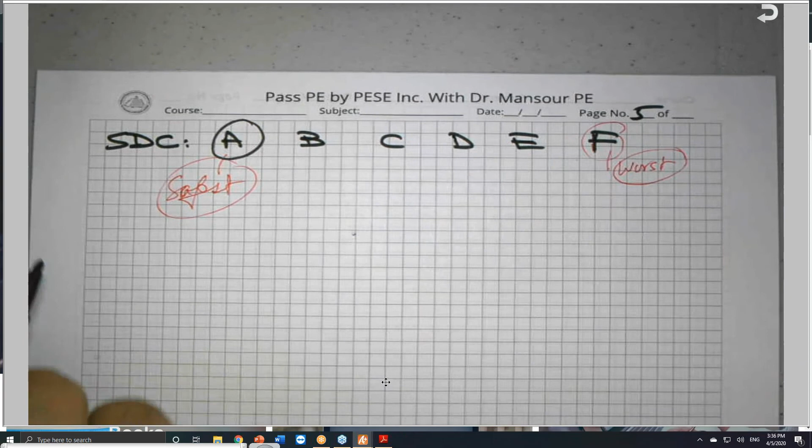California, we are here. In California, as I mentioned, we have seismic design category D, E, and F. D is the majority of them, in Central Valley - Fresno and Bakersfield. And 80% are between E and F, which is San Diego and the Bay Area.

80% of the population lives in E and F. These are the letters used for the seismic design category SDC. The other set of letters they use is for the site class.

Site class, which is in chapter 20, if you remember - chapter 20 of ASCE 7-16. There is one table there; they took the table from all other codes and put it only in chapter 20. Site class is basically talking about the soil type - this is what is meant.

In the past they used the letter S, but this code dropped the S. So the site class, or soil type, is basically also A, B, C, D, E, and F. Right now this D, they broke it down in this code - we have two Ds right now.

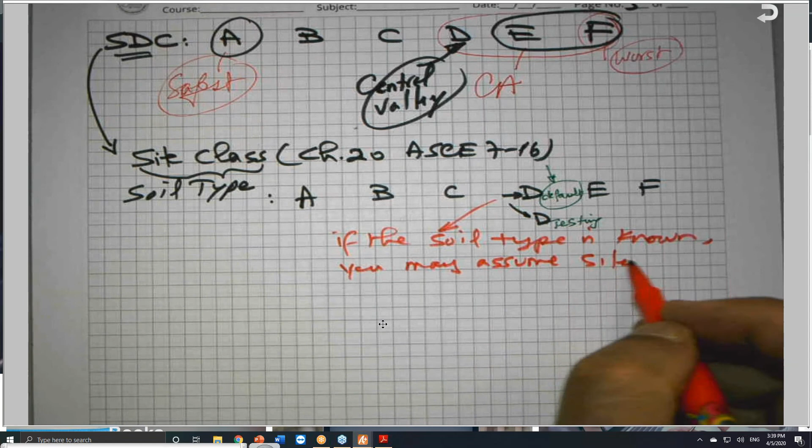related to the site class, the code says that if the soil type is not known, you may assume site class D, as long as there is no geotechnical report or data to indicate that E or F may be present. So this was a default - I don't have a site, I'm going to build whatever the future building will be.

And this site is not known to me. I don't have any geotechnical report, and there is no indication that soil type E or F may exist. So I can assume it to be D, but they call it 'D assumed' or default right now.

They became very stringent about that, by the way. They start to say that if you are going to assume it to be D, we will call it default, and you have to use certain criteria for the default. But if you do have testing, actual testing, based on the table - what is the table?

Let me show you the table. The table is given in chapter 6 of my book, at the beginning of chapter 6. This is table 20.3-1 - here it is. This is the table given in ASCE 7, chapter 20, and this is the only table.

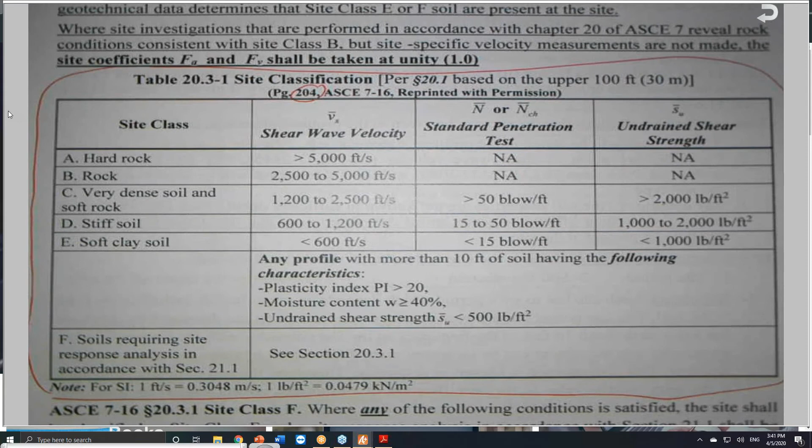So if you do have some properties, obviously soil type A is the best, which is hard rock. Soil type F is the worst. And every time you see E or F, or even D, if they mention D, E, or F in the problem statement, there is something tricky in the problem. I need to be aware of that.

And soil type F does not have any description in the table because they give us the description in a different section immediately under it. Soil type F has another item on the following page. There are 4 items - item number 1, item number 2, item number 3, and I believe there is another item number 4 on the following page.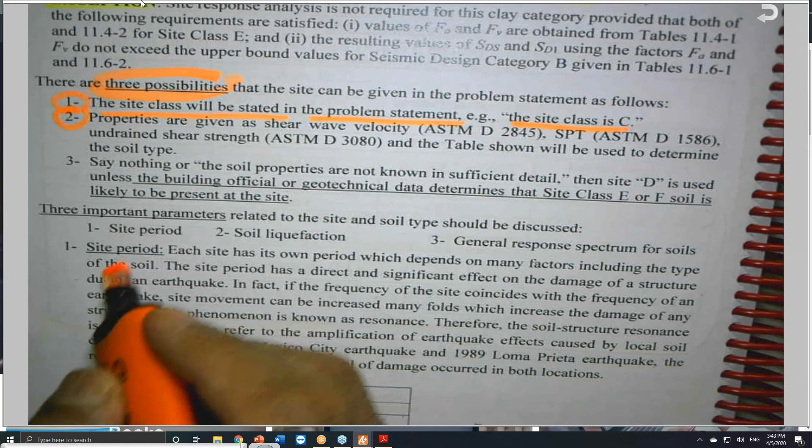The other possibility is that he will give you some properties - given properties like shear wave velocity, based on ASTM D standard penetration test, or undrained shear strength. In this case, I will use these properties to go to the previous table. I will answer you, my friend. Sorry, I did not ignore you, but I'm waiting.

One of you raise the hand, and after that put it down - I will look to your question shortly. If properties are given like shear wave velocity, the standard penetration test, or the undrained shear strength, in this case you need to come to this table, and you will pick the proper site class based on the properties. This is another possibility, which is possibility number 2.

Possibility number 3, which is the one they try to make okay, is they say nothing in the problem, but they tell you the properties are not known in sufficient detail. So site class D is used unless the building officials determine that site class E or F may exist - may or likely to be present. Likely is likely to be if a geotechnical report is telling me in this area there are many E's and F's, don't assume it to be D. So those are the 3 possibilities.

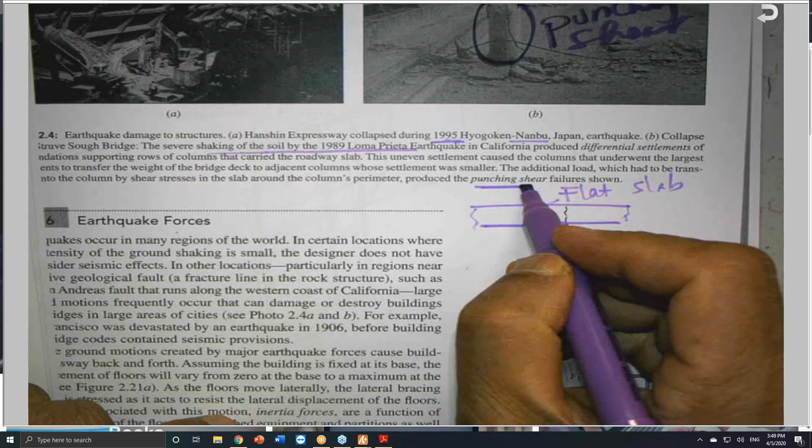In order to minimize or eliminate punching shear, you will find that when they build bridges, or even buildings, we don't make this scenario. Instead, if this is a slab, we increase the contact area by doing this: a drop panel like this. So the shear coming from the column, which is a concentrated load, will be distributed over a wider area, so the shear will be less.

Or sometimes they do this: they step it like that. Some designers prefer to do this in order to reduce the shear. So drop panels, and all these things are shown in my book, explained there.

Or for bridges, for example, what we normally do is this: we flare the end of the column in order to increase the shear area, so the shear stress will go down. So all these things are very, very important.

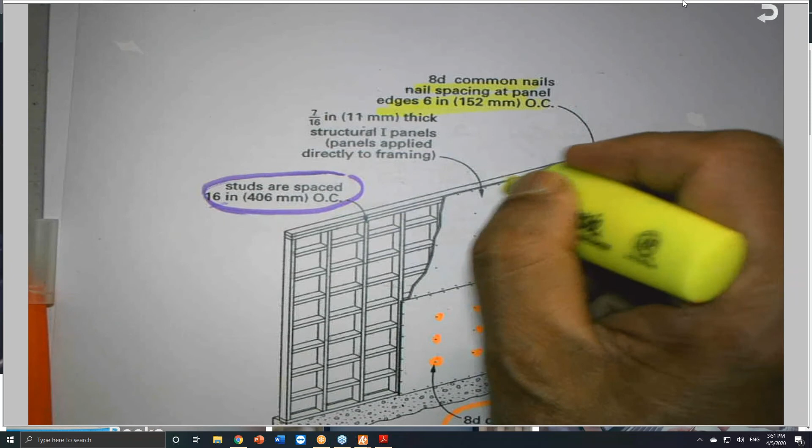So I need you to be aware of that. We talked about this in chapter 9 and chapter 10, but I promise you there is a picture. Here it is. And this is supported by the concrete foundation, could be a slab or a footing, as we talked about.

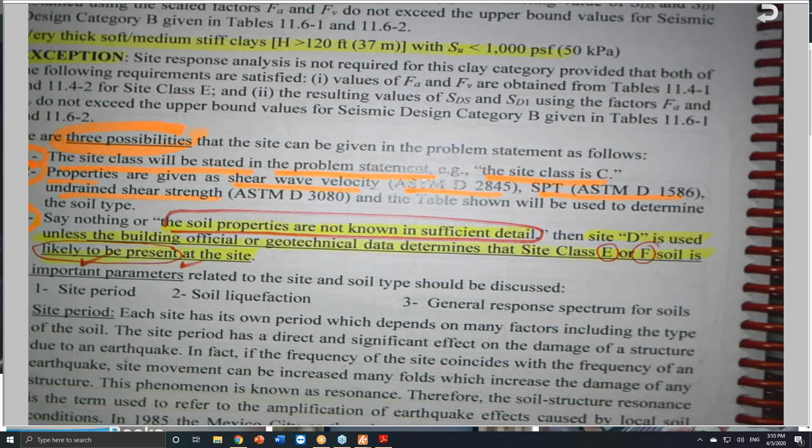So they still have this statement, but here they are talking about D and D-default. As you remember, I sent you some stuff on SDS and SD1, the acceleration we calculated together one time. When we come to D, we have two columns, one for D and one for default, or assumed. You'll find those two columns, and I can show you this.

So this is what is meant by the code. I don't know if the language is still making it difficult, or if you agree with me, that's good. If you disagree, please let me know, and I would be glad to correct it if you find something in the code otherwise.

I mentioned not - if the soil is not known, yes. If the soil type is not known, thank you - our friend says I missed the word 'not' here. Yes, if the soil type is not known, that's correct, you may assume that. Thank you, he said the word 'not' is missing.

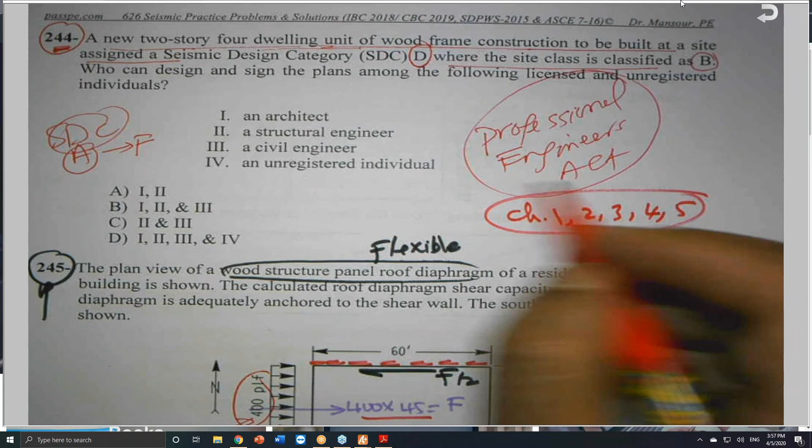Going back to the question I was referring to - sorry, I try to elaborate as much as I can, and probably next time I will prepare questions which I'll extract. I'm not going to reinvent them; I can rearrange the questions to cover, for example, chapter 1, chapter 2, chapter 3, chapter 4, chapter 5. I can pick these out, and I'll email it to you, and you can work it out, and after that we'll solve it together.

After you try on your own, okay? I will call it a mini exam. I'm not going to give you 55... or I can make it 55. What about that? I will make it 55 questions, and you try to spend 2.5 hours and solve it on your own using references. Take it seriously, I will do that. I can collect this, and every time we meet, I can generate 55 questions and send them to you.

But I will go in order - for example, chapter 1, and these 55 questions will be related to chapters 1, 2, 3, 4, 5, which normally I cover in one day. After that we'll go to chapter 6, which is the lengthy chapter, seismic design requirements for building structures, and so on, chapter 7, and so on, all the way until chapter 16.

Maybe I will do this, at least. So when we meet, I'll say please go to the on-demand and watch the on-demand videos, which are arranged the same way. The staff are helping me with that, they are working on it. Hopefully it is done or very close to being done. So the on-demand videos will also go from chapter 1 all the way through.

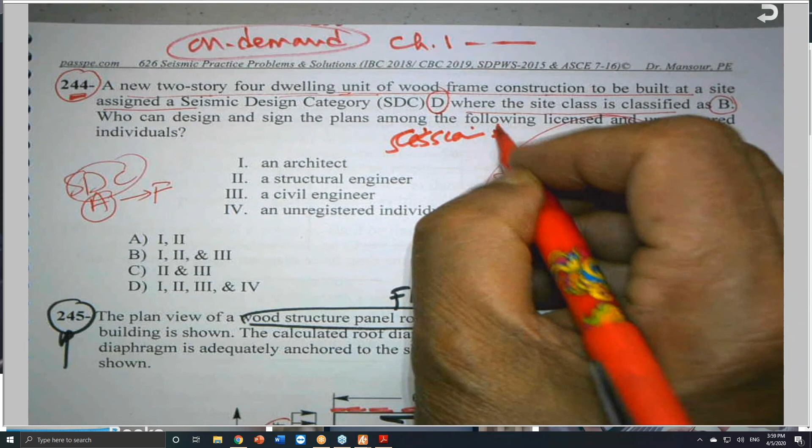To make it easy for you, session 1A and 1B, especially for the download - especially nowadays the internet is extremely crowded, everybody is downloading movies and communicating with the whole world about families and relatives. So the internet is so busy, it crashes a lot, and we are suffering through this. But what can we do? So bear with me, and I will do all my best to help you as much as I can.

Let's go to this question here. A new two-story four so and so - this is seismic design category D and site class B. Who can design and sign the plans among the following licensed and unregistered individuals? Who can? An architect can do it, okay.

Or a structural engineer, a civil engineer, or an unregistered individual. Obviously the SE can design any building. In fact, there are some buildings that cannot be designed unless you are an SE. Public schools and hospitals cannot be designed unless designed by an SE. A civil engineer, even without a BE, can do it. An architect can do it. So the category that might surprise you is category 4, an unregistered individual.

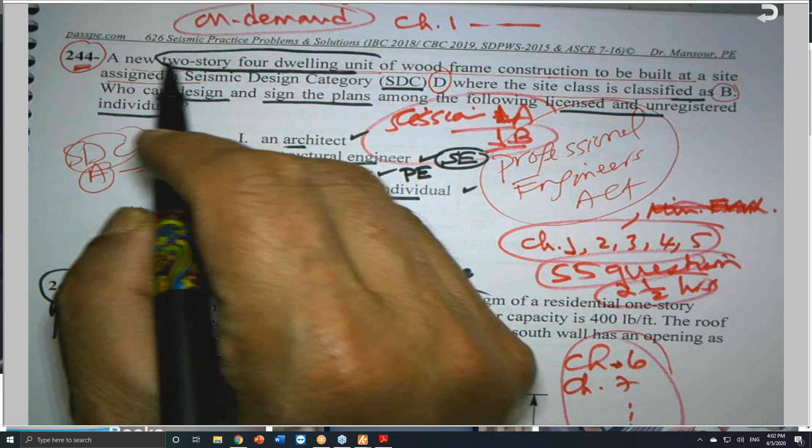And this is a 2-story, 4-dwelling unit. It must be like that. You'll be amazed that they are also entitled to do it. And this is answer D.

Who said that? Not me, not anybody else, but the code. So I need you to check the Building Design Authority Guide. I put this in chapter 2 of my book, and I will double check it one more time because sometimes they change it. In chapter 2, there's a summary of the Professional Engineers Act. I know too many codes, but here it is, Building Design Authority. I got this from their website, and I will double check it one more time.

A structural engineer may design any building of any type. Civil engineers may design any building of any type except public schools and hospitals. An architect may design any building of any type except the structural portion of a hospital. Unlicensed individuals may design only the following types of buildings, and they have listed these. So this is what is written in the code.